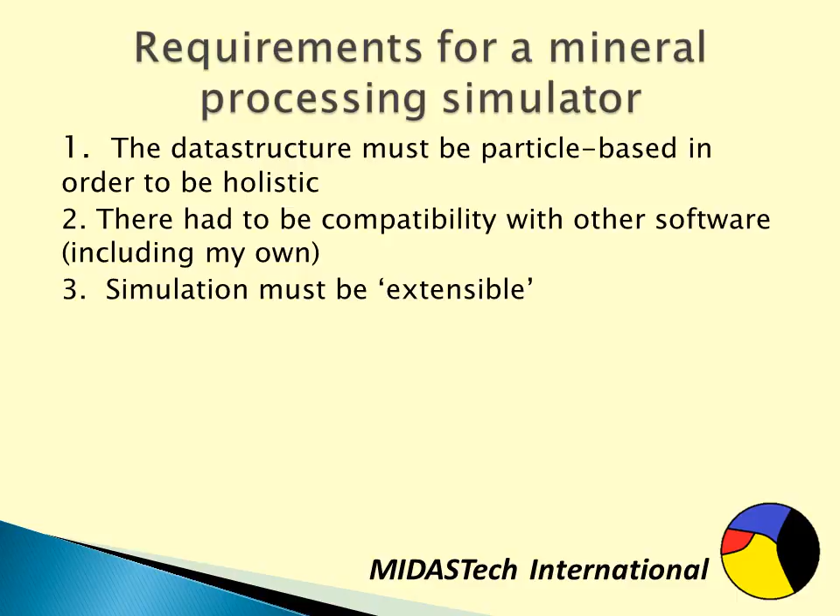The data structure must be particle-based in order to be holistic. There had to be compatibility with other software, including my own. Simulation must be extensible, meaning that users can add their own. One must recognise that simulation is only part of a larger analysis process.

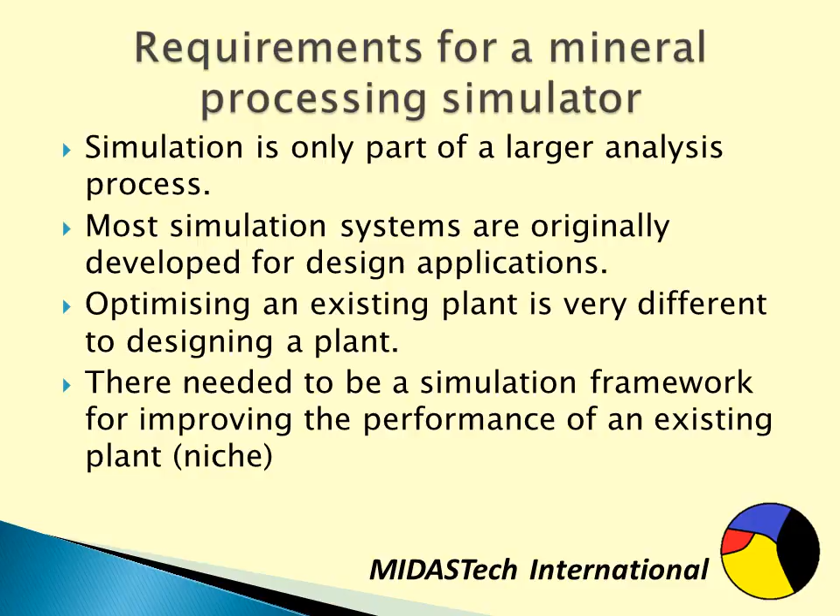Most simulation systems are originally designed for engineering design applications. Optimizing an existing plant is very different from designing a plant, and so there needed to be a simulation framework for improving the performance of an existing plant. And this is the niche market that our company is entering.

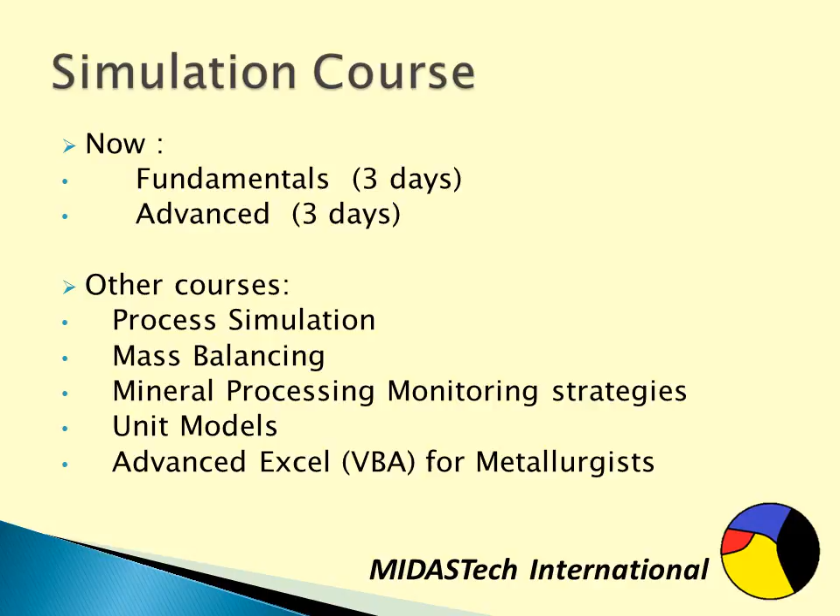There are other courses I give which are derivative courses of the simulation course: process simulation, mass balancing, mineral processing monitoring strategies, unit models, and advanced Excel for metallurgists.

I've already explained that in order to model a plant holistically, we need to use particles. That's because particles are truly what is being processed by a mineral processing plant. Also, we need to differentiate the ore properties from the unit models.

Hence, the same particle going through the same unit will have the same behaviour. Now, behaviour doesn't mean that if you put it through the same unit once, it goes through the concentrate, and the second time it must go through the concentrate. What it means is that the second time it has the same probability of going to the concentrate. So we see there is an association between behaviour and probability, and more importantly, a strong connection between mineral processing simulation and probability theory.

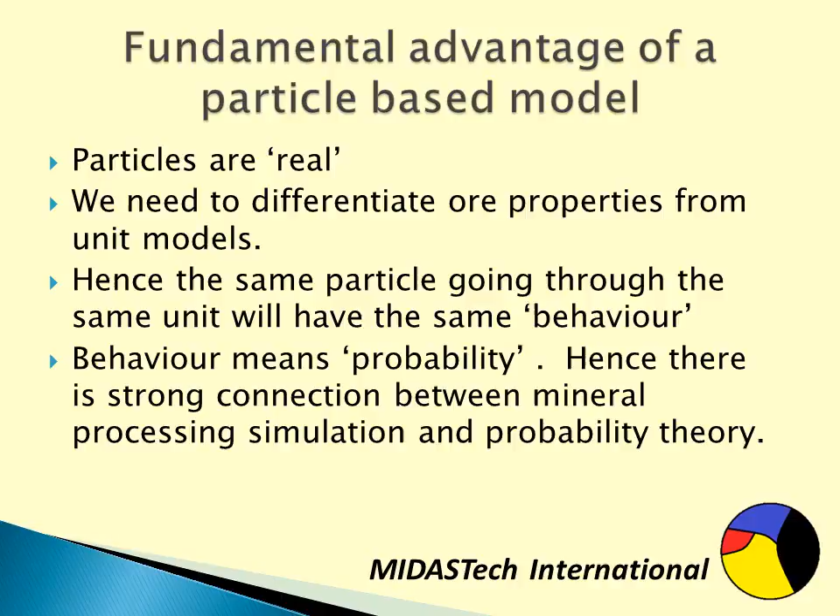So here we see a multi-mineral particle. It contains a number of different minerals. The red might be chalcopyrite and the yellow might be pyrite. Now, the floatability of this particle is affected not by how much one particular mineral is, but the distribution of all the minerals.

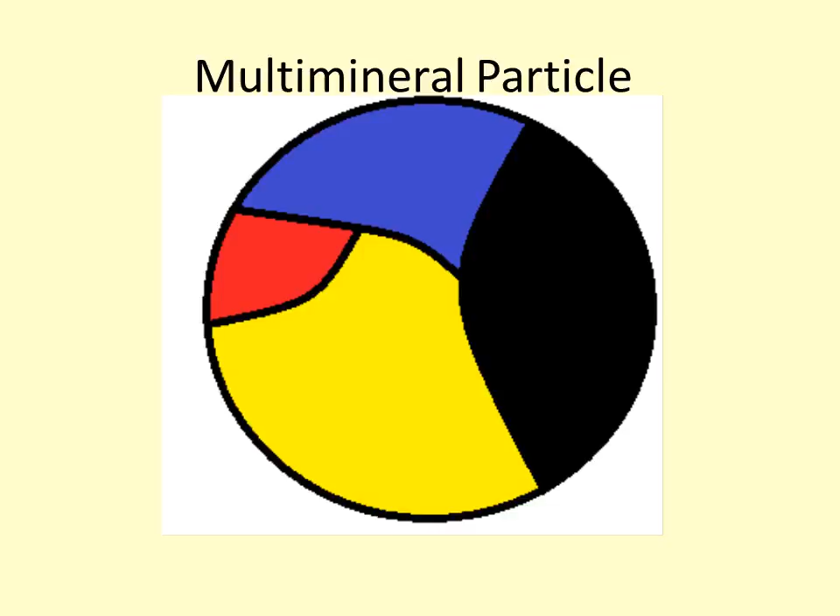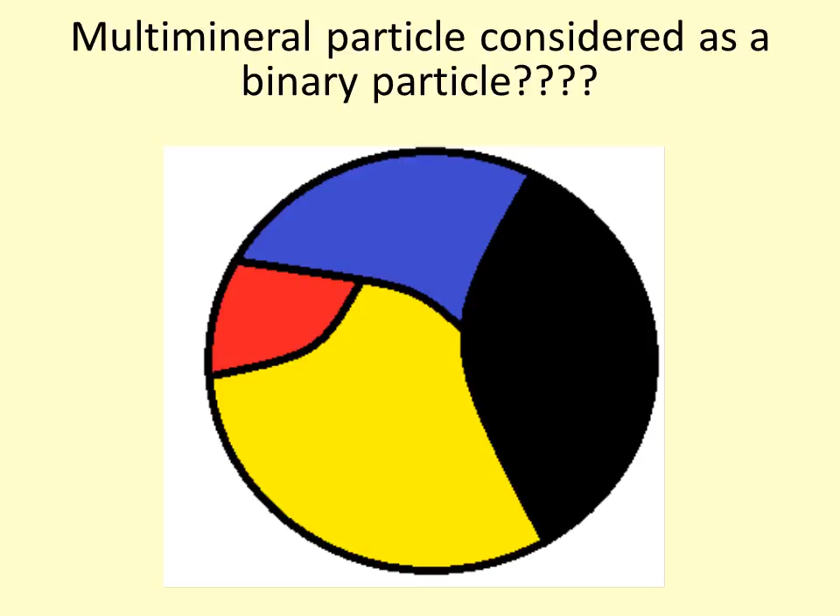So for complex ores, it doesn't seem very sensible to use any other data structure than multi-mineral particles. This is largely where existing mineral processing simulation systems have become stuck, because at best they know how to model binary particles and they don't really know how to treat multi-mineral particles. In the course, I provide the mathematical framework by which the extension to multi-mineral particles is not difficult. It just takes a little bit of time to understand the concept.

So here are some schematic diagrams explaining the basic concepts. Large feed particles go into a ball mill and they break and form smaller particles. In order to model this, we would like to know the probability that particular product particles came from particular feed particles.

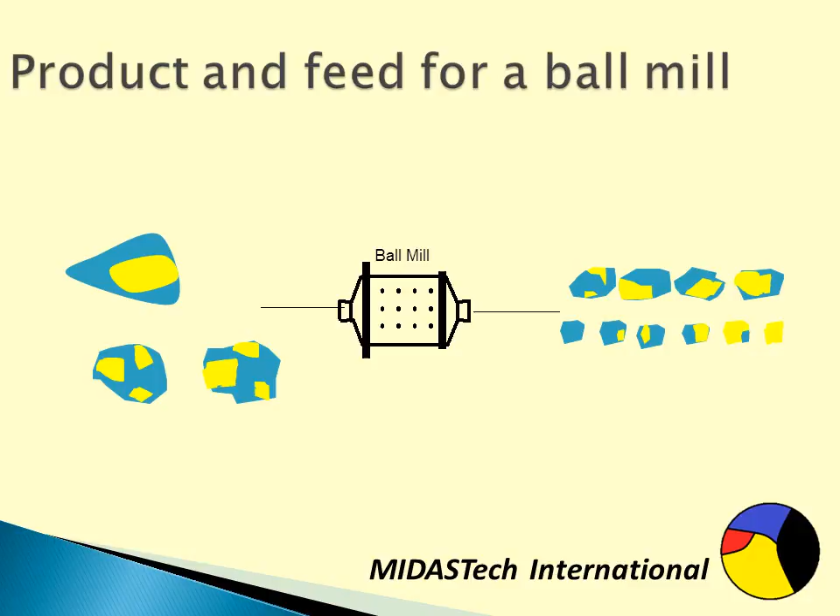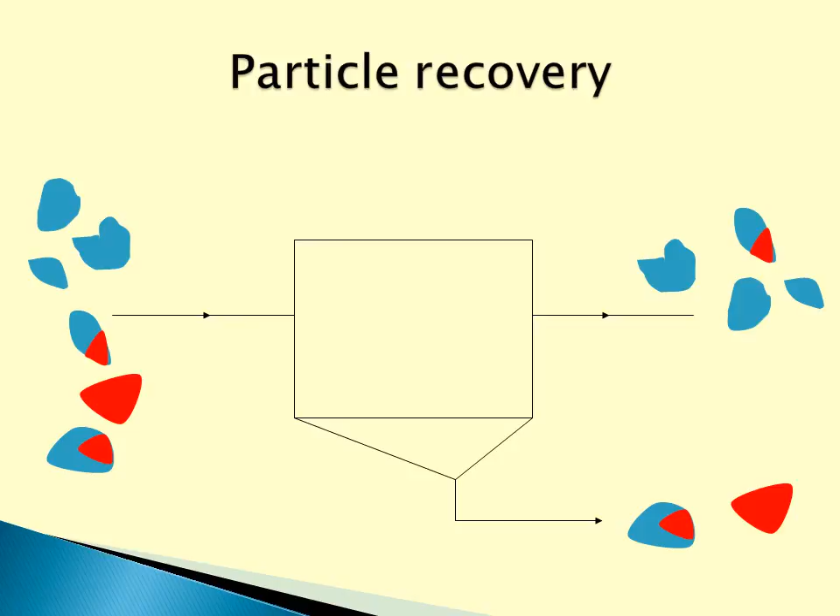I've now explained that probability theory is fundamental to mineral processing. Most engineers are comfortable with the phenomenological type of modelling strategy, which is inclusive of semi-empirical methods. Yet that type of approach is complementary to probability modelling. Many equations used in mineral processing - comminution, cyclone, flotation - also have a basis in probability theory.

Yet probability theory is not taught at appropriate depth to mineral processing engineers, inclusive of chemical engineers and mechanical engineers. There is generally a poor distinction between statistics and probability theory. I would argue that many mineral processing engineers are not aware that statistical methods and probability methods are not necessarily the same. Of course they're connected, but you can have professional statisticians and professional probabilitists.

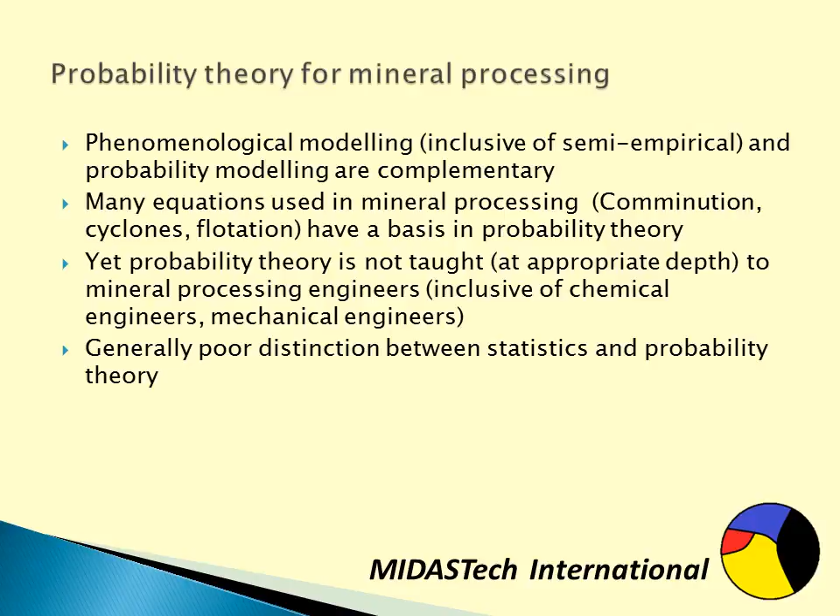We're now just going to go a little bit deeper to understand the difference between a macro process and a microprocess, because when we're talking about multi-mineral particles, it's quite difficult to measure these throughout the plant. So we have to distinguish the actual process from the observations. Something that we observe, such as assay, can be considered an observable. A microprocess is a process hidden from the observer that affects the macroprocess. Microprocesses do not have to be measured, but can be inferred from observable variables.

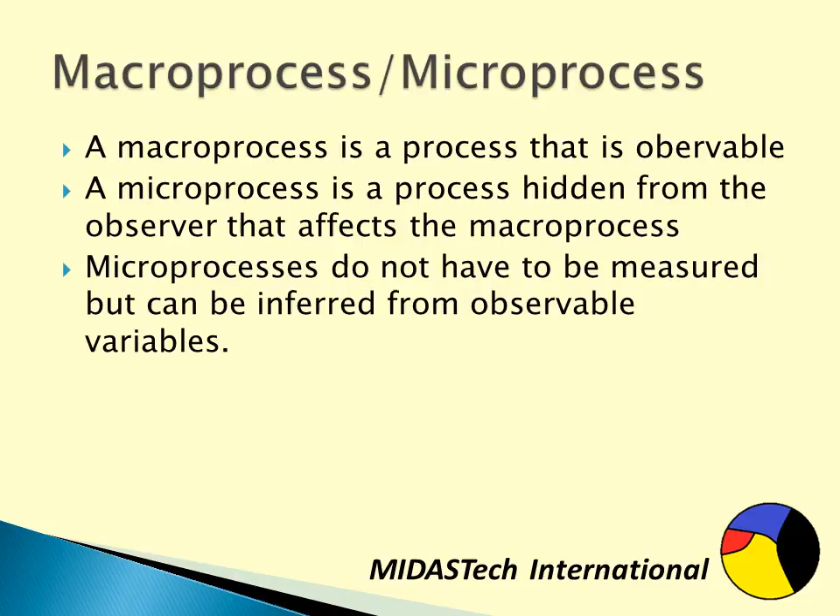Now we're going to go even further back in time, to 1904, to one of my favourite applied mathematicians and theoretical physicists, Ludwig Boltzmann. Boltzmann believed in the application of probability theory to theoretical physics, and also believed that atoms formed the fundamental structure of molecules. But at the time, his theory and the theory of others about atoms was rejected by most physicists.

This meant that Ludwig Boltzmann, when he wanted to go to a physics conference in St. Louis, was not invited to present at the physics section. Rather, he was stuck in a section called Applied Mathematics. He believed in his methods. 100 years later, they're shown to be valid, yet at the time he was given a lot of resistance. And yet we look back and laugh at this particular problem of Ludwig Boltzmann.

But here we are in mineral processing, over 100 years further than the physicists, and yet we're still not really using the correct data structure.

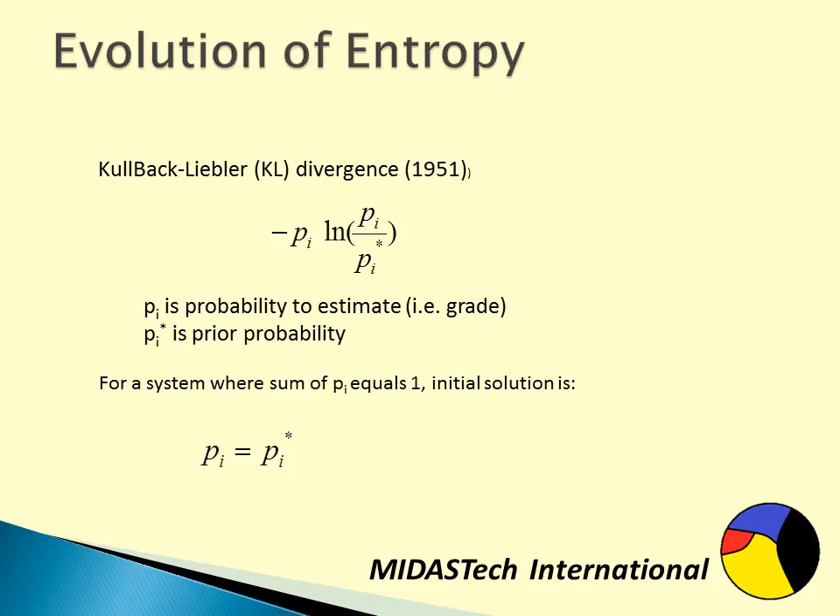The idea of a prior is important to understand because it's not the same as an assumption. A prior is a belief in the absence of information to the contrary, and it's adjustable. The variables are adjusted from their priors to satisfy other known information, such as fixed constraints, mass balance constraints.

In the absence of a prior, there's an interesting concept called an ignorant prior, which is commonly used, for which all variables are given the same value.

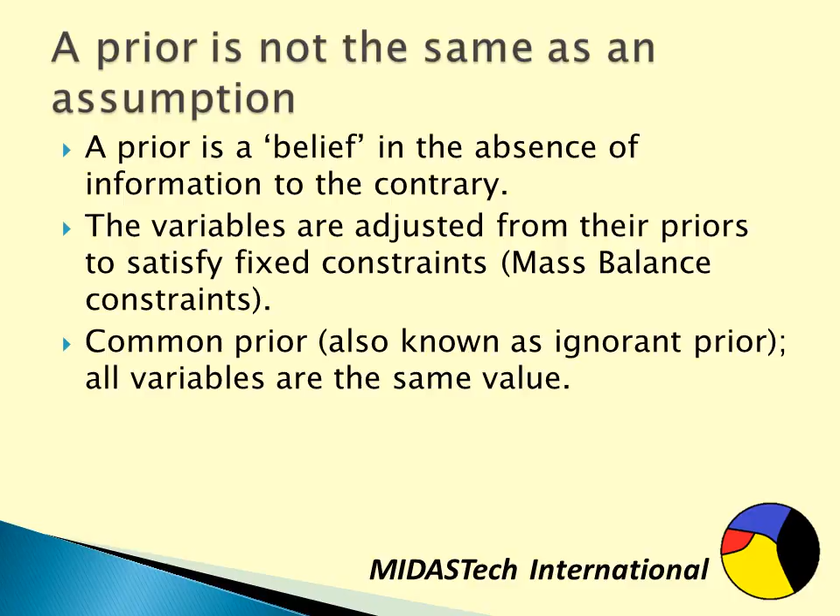We're now going to revisit the 9 steps, and where appropriate, look at it from a probabilistic viewpoint. Now, step 1 is flow sheeting, which really doesn't have much to do with probability theory. But many simulation systems create in-house dedicated flowsheet systems, rendering it difficult for users to use other systems. And one could argue it's an intentional commercial strategy.

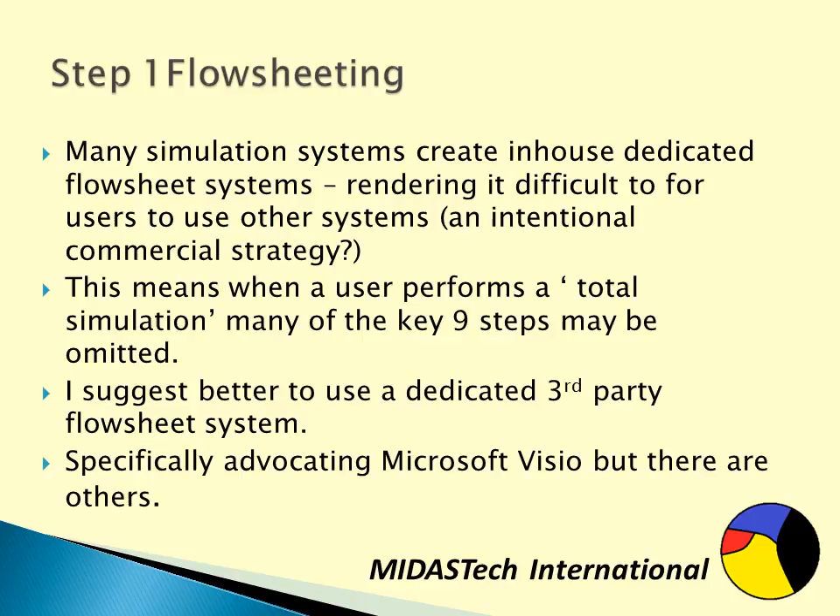This means when a user performs a total simulation, many of the key 9 steps may be omitted. And so, personally, I would prefer to use a third-party flowsheet system. I'm specifically advocating Microsoft Visio, but there are other systems available.

Microsoft Visio is at least 20 years old, and when I first discovered it, I actually went to the local electrical store, Harvey Norman, and I saw that it costs $45. These days it costs about $500 if you can get it fairly cheaply. But most mining company professional staff would already have access to Visio through Microsoft Office Professional.

Step 2, data collection. If a company doesn't collect data, then it might collect limited useful data, excessive data, or collect useful data but isn't analysing it. I have discovered that the major issue most companies would have with the 9 steps that I'm advocating would be this problem of data collection. Many companies do not collect data, at least not in a format that's useful to identify how to improve a mineral processing plant.

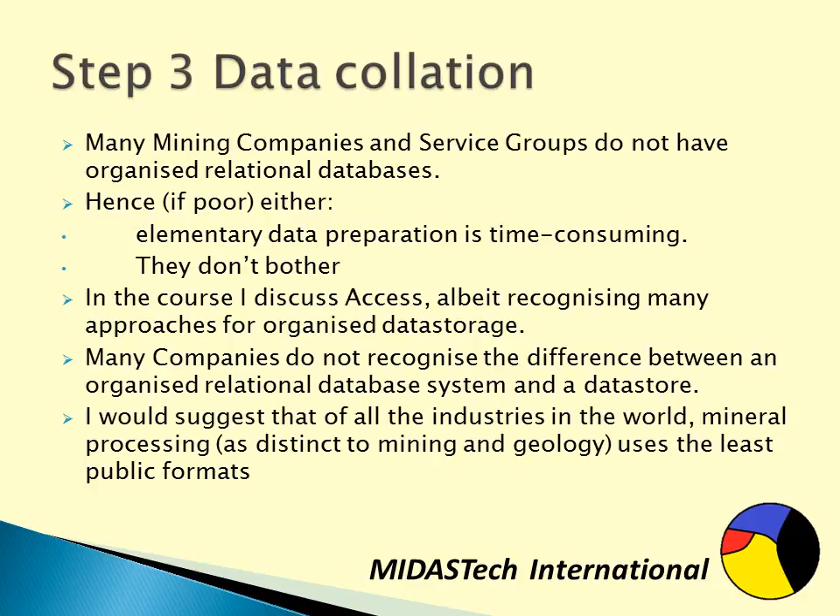Step 4 is mass balancing. Mass balancing is a process by which observed variables are adjusted so that mass flows are consistent between feed and product. That's the primary objective. The second objective is that some unmeasured variables are estimated. And the most common unmeasured variables are solid flows and unmeasured streams.

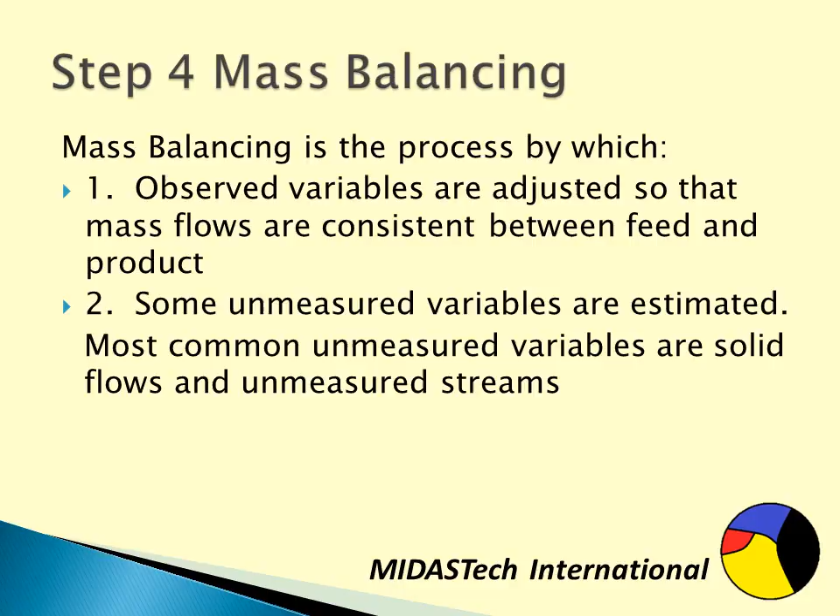Yet, the more unmeasured variables we're trying to estimate, the harder it is to actually do. And there comes a point where the conventional approaches of mass balancing are no longer applicable. At that level, where we now have lots of unknown variables, those variables can be estimated by what's called plausible inference. So we need to differentiate deductive inference from plausible inference, and we'll discuss that further. In law courts, deductive inference is allowable, not plausible inference. So in plausible inference, there's a fairly high level of uncertainty.

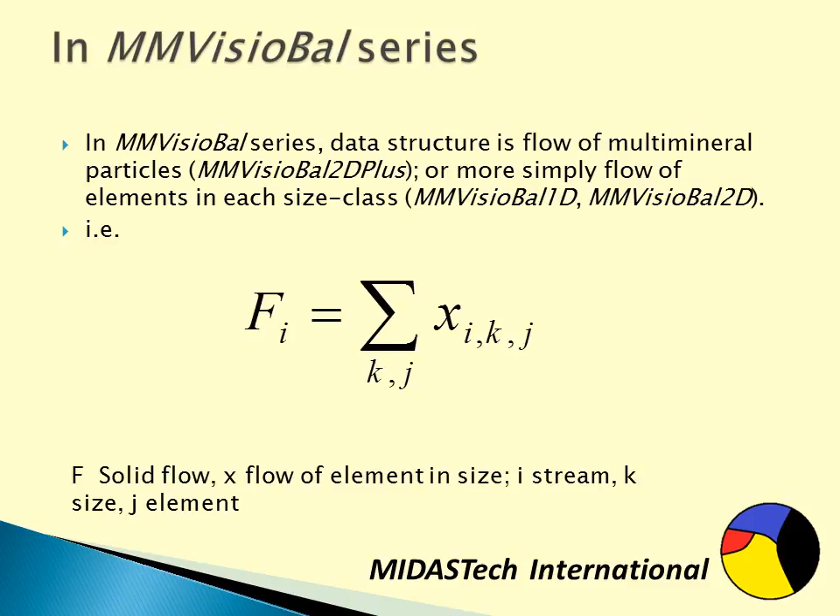In my software, in the mass balancing software, the data structure is the flow of components. So if we know the multimineral particle types, it's the distinct flow of multimineral particles. But if it's not that, it might be the flow of the elements in each size class. This data structure is quite different to classical mass balance systems.

I actually use an information theory approach. I don't specifically use priors. The information that is known, such as the observation of variables, is regarded as constraints. So in stage 1, I use an information theory approach, and I use the observations as constraints. Of course, some of the observations might be contradictory. So in stage 2, I remove the observation constraint and just let it finish iterating.

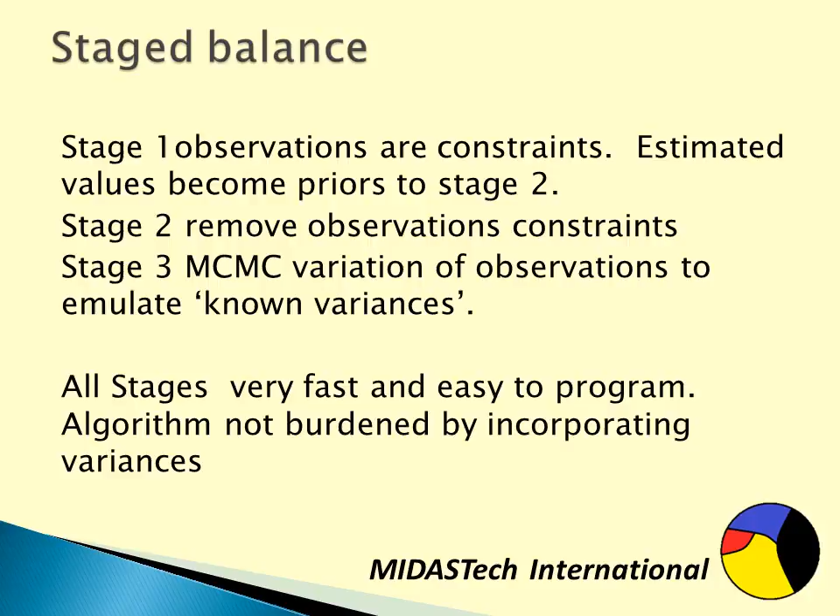And now that's a mass balance where the values have been adjusted. Now, I don't have to use the variances of the observation value. This is a common method used in mineral processing, and in general, it's very confusing because the variances are not known, yet they still put them in. However, for those users who wish to use variances, we can still use information theory. A Markov chain Monte Carlo method allows variation of observations to emulate known variances. This information theory approach means that all stages are very fast and easy to program, and algorithms are not burdened by incorporating variances.

Step 5 is inference, and this is a key step that is being made available through the MIDASTech software. The data structure used in MMVisioBal is a particle-based system rather than variable-based. It turns out that if sizes are measured and bulk assays are measured, MMVisioBal will still estimate the assays within sizes even if they're unmeasured.

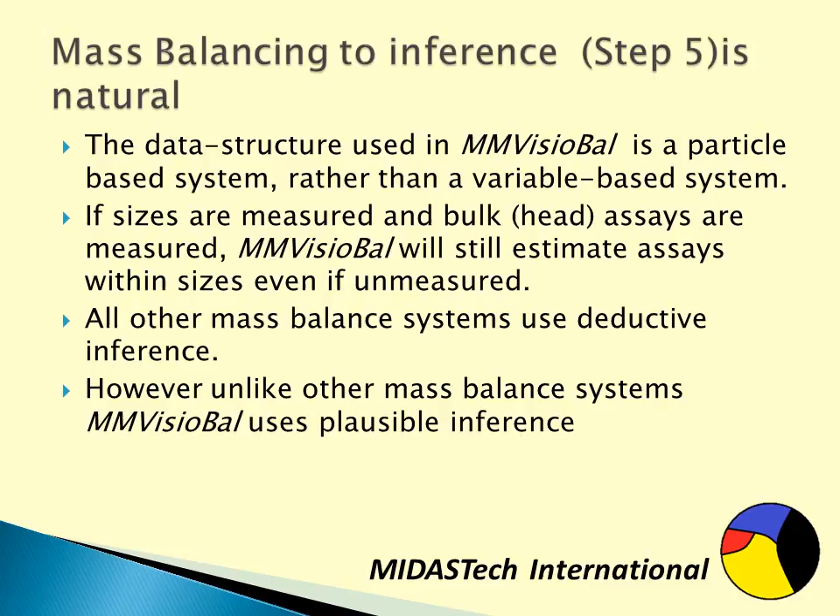All other mass balance systems use deductive inference. This means they cannot estimate the assays within sizes if they're unmeasured. So the distinction between this software and conventional software is that it uses plausible inference.

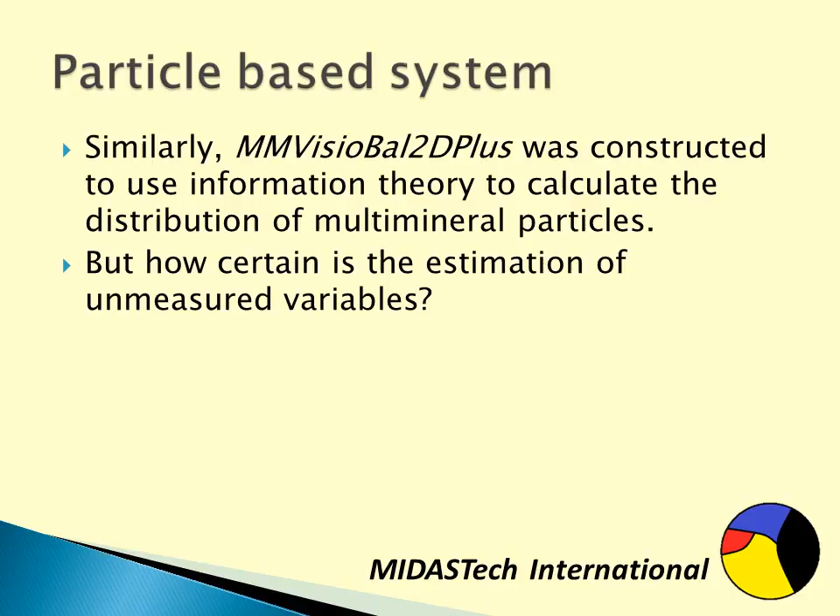MMVisioBal2DPlus does use the multimineral particle distributions, and so it can be used to estimate the distribution of multimineral particles in each stream. The question is, if it's using plausible inference, how certain is the estimation of these unmeasured variables? So how uncertain are some of these estimated variables? Some of the estimated variables may be so uncertain as to be rendered impractical, and others may be so certain as to be practical. So increased functionality has caused some general uncertainty.

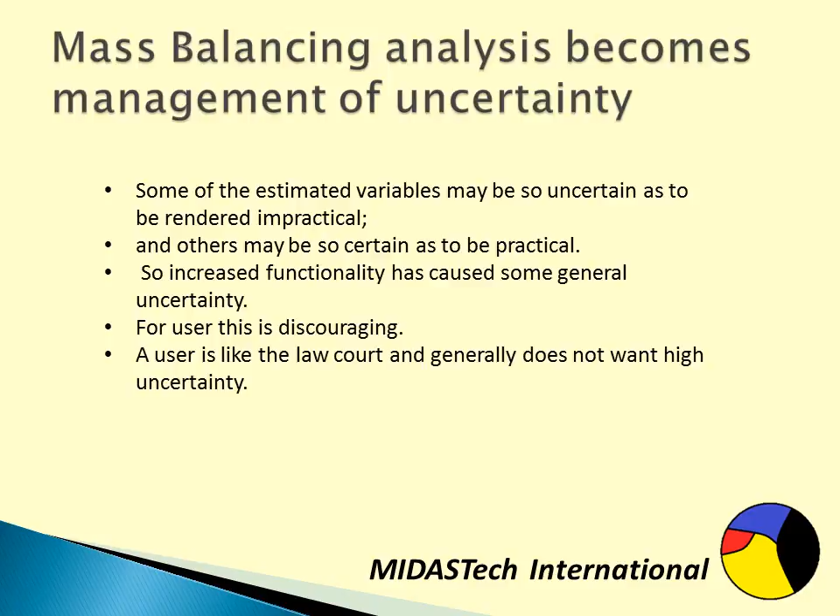For a user, this is discouraging. A user is like the law court and generally does not want high uncertainty. And therefore I had to think about methodologies to improve the certainty of these unmeasured variables. And it became obvious that if I used information from different audits, it would provide me with a huge advantage. And there's a provisional patent filed on this methodology.

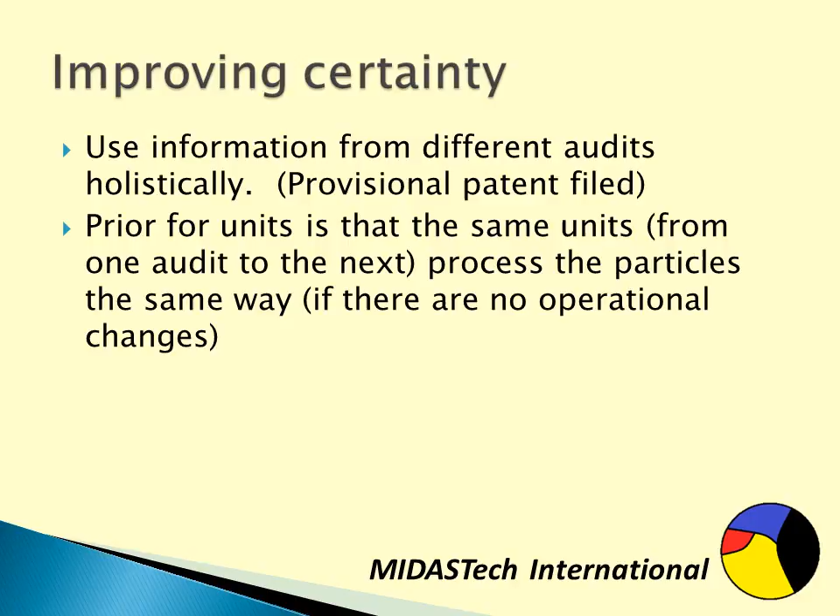The prior for units is that the same units process the particles the same way if there are no operational changes. And if you remember, this was the fundamental concept for why we need to differentiate ore properties from unit properties. There is a surprising benefit to this methodology. Because the information from different plant audits of the same plant are now integrated, we need less measurements per audit.

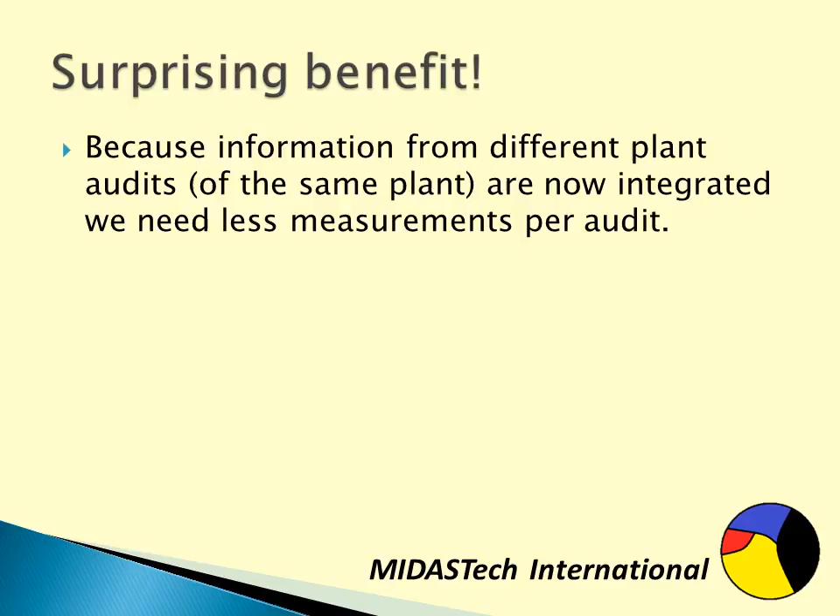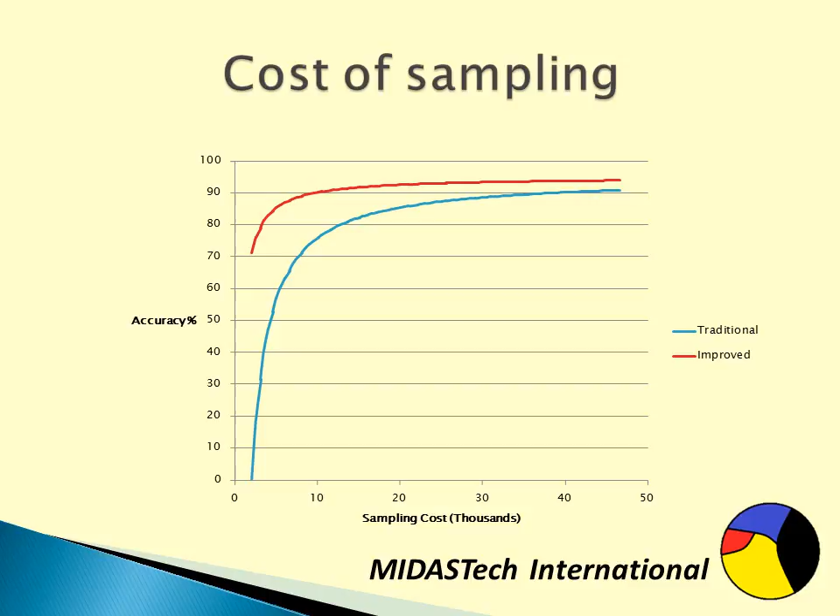I've put forward this idea that the methodologies advocated in this presentation can greatly reduce the cost of sampling. The blue line indicates the traditional approach, and the red line indicates the new approach. For the same cost, we get higher accuracy, or for a given accuracy, we can do it with far less cost.

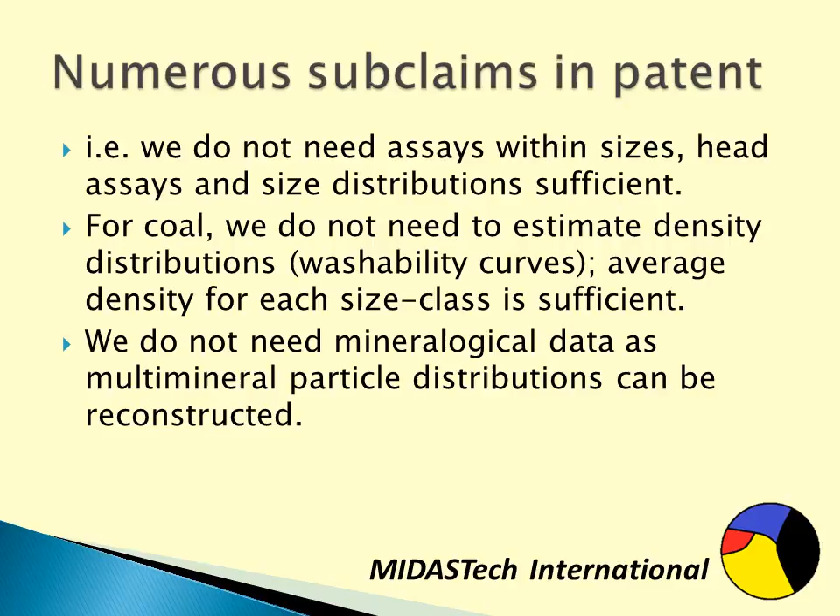There are numerous subclaims in the patent. We do not need assays within sizes—head assays and size distributions are sufficient. For coal, we do not need to estimate density distributions or washability curves; average density for each size class is sufficient. We do not need mineralogical data, as multimineral particle distributions can be reconstructed.

Yes, because a detailed sampling campaign may not actually be required. No, because the more measurements, the better—remember, there is uncertainty, and it allows reduction of uncertainty and better identification of problem units. But what I'm really saying is that this methodology provides a different viewpoint: information theory provides the basis for strategic sampling.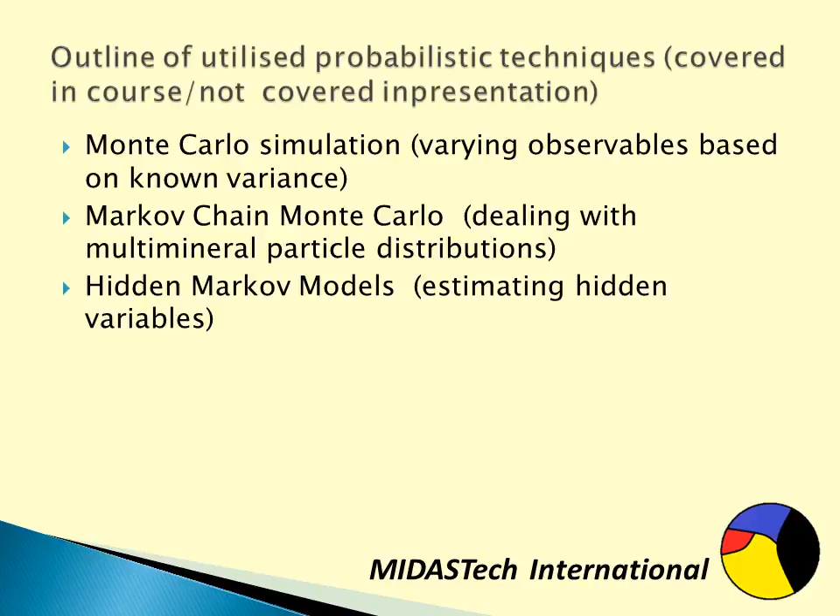In the following diagrams, I wish to just elucidate the methodology. The traditional approach is: we have input observable ore properties, operating parameters, a unit model, and from that we estimate our output observable ore properties. And that would be fine if it worked.

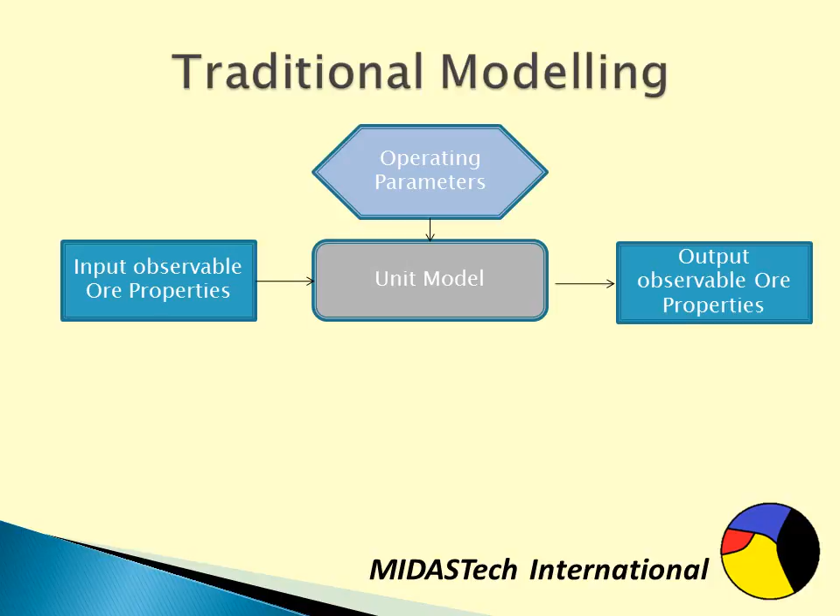The trouble is that the actual mineral information is more detailed than those observable ore properties. So the only correct way to do it is to recognize that the ore properties have to be understood in depth—I've called that the input hidden ore property. We now apply that information to the unit model and we get the hidden output ore properties, from which we can get the output observable ore properties, such as grade of mineral and recovery.

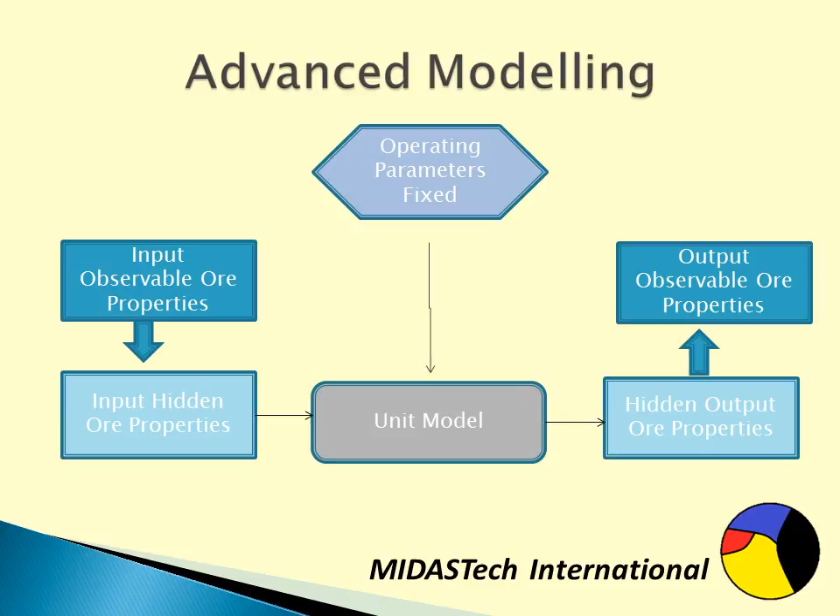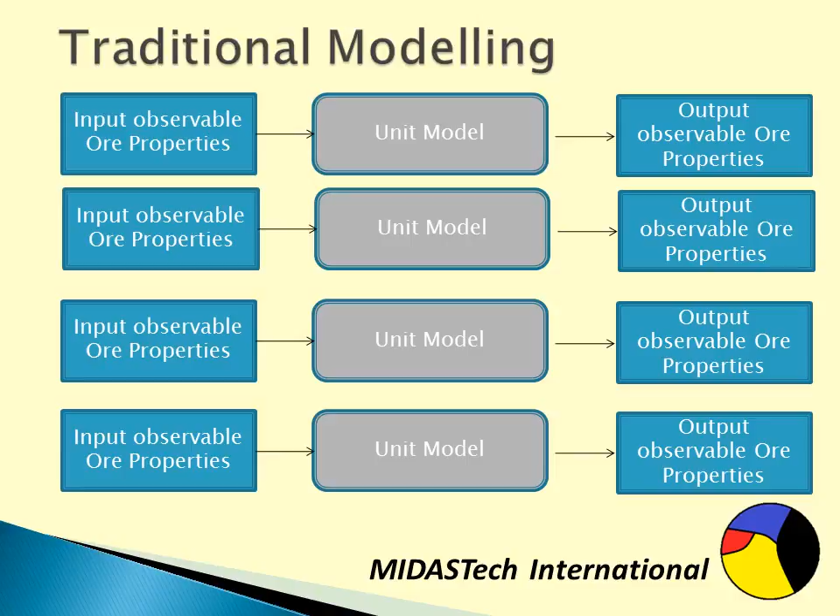Traditional approach, particularly true for laboratory sampling: input observable ore properties goes to, say, a lab test, a flotation test, and we look at the outputs. From that, we work out the properties, the kinetic rates. Another sample, model, set, output, and so forth.

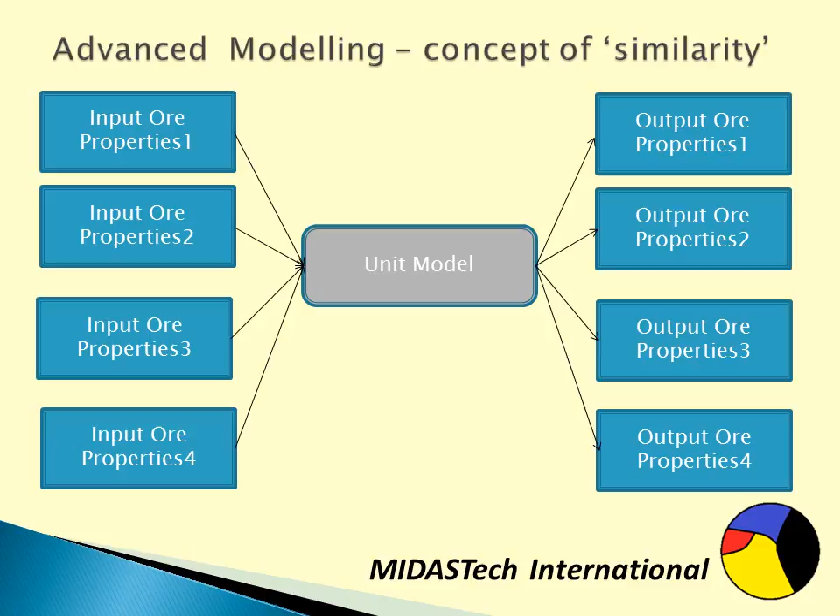I'm arguing that it's far more efficient to realise that they're going into the same particular unit, and therefore the unit model, if correctly identified, is the same for each of the different samples. And so we're trying to holistically consider all the data.

Step 6 is to define the operational variables. And this is where the seminar and the course gets controversial, because many models don't actually use operating variables. They are indeed very hard to implement practically. This doesn't mean they don't provide insight. But if you actually analyse where we are at with mineral processing modelling, then we're still very far behind from where we should be.

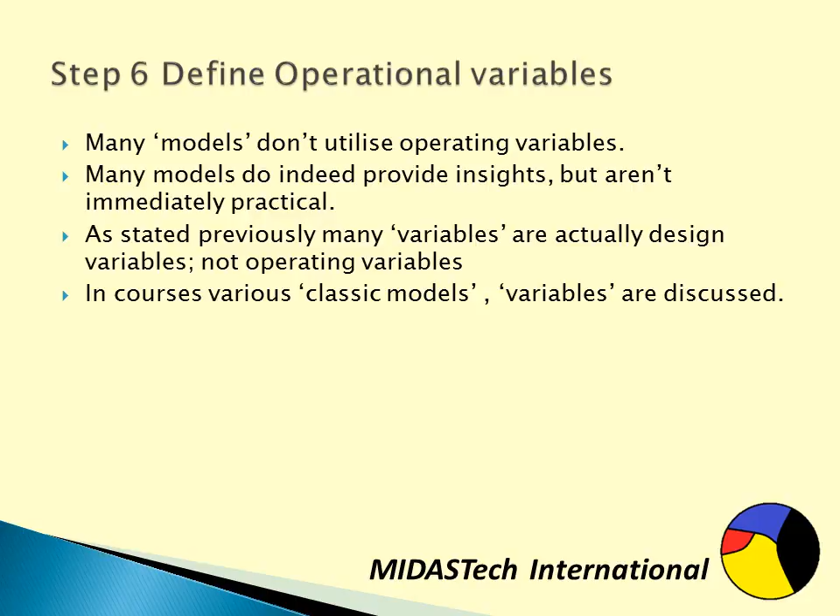Many variables used in simulating the plant are actually design variables rather than operating variables. In the course I give, I discuss the various classic models, and I go into the variables in much greater detail than I do here. It does indeed take about half a day to study.

Users need to specify the operating variables. So the software I've created has an operational parameter registration system. It provides a framework, and the software is customized for specific clients. Yet there may be two different staff who wish to simulate the same plant, but interested in different operating parameters.

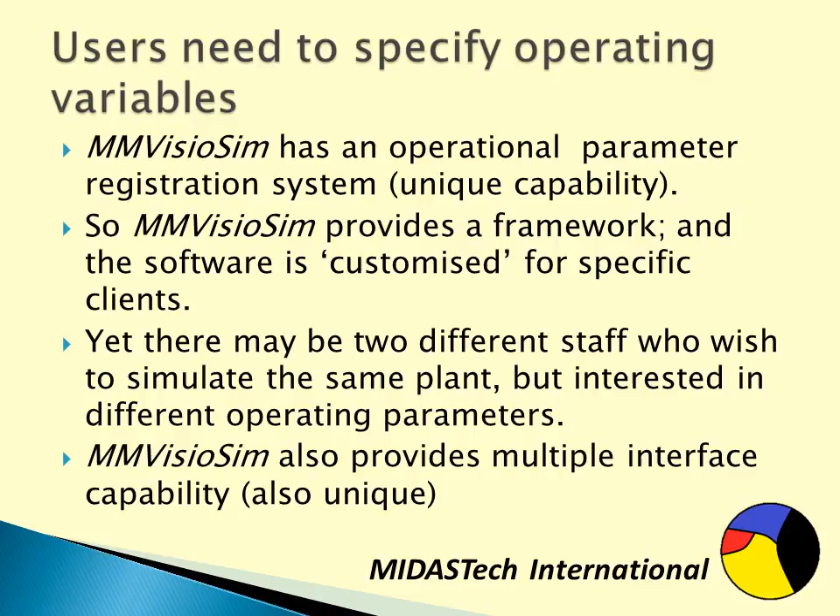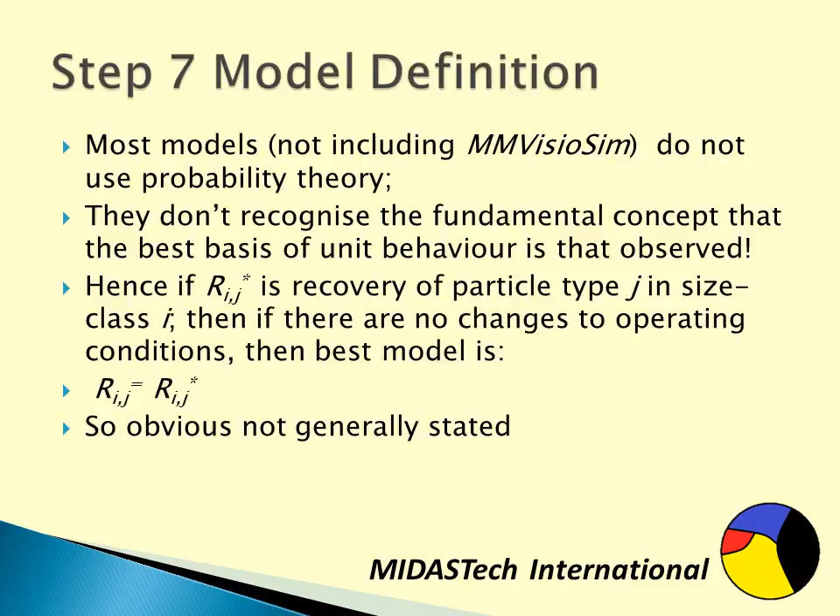So the inference method allows one to identify how units are processing ore at the particle level. Models should therefore be based on predicting changes to unit behavior.

When you think about it this way, you recognize that many of the simulation books in mineral processing need to be rewritten. Because MMVisioBal2DPlus looks at how units process ore, if operators record changes to operational parameters, it's then possible to more easily develop models for unit changes due to operational parameters.

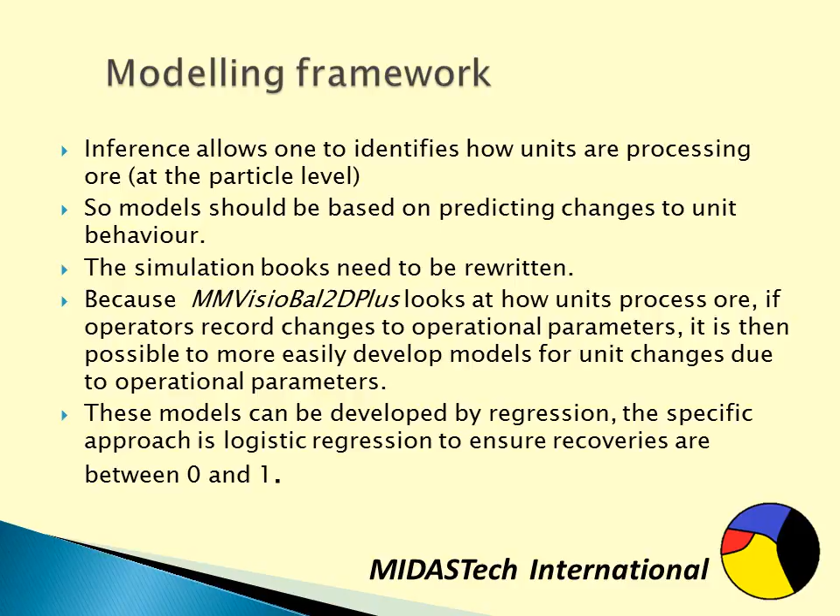These models can be developed by regression. The specific approach I advocate is logistic regression, to ensure recoveries are between 0 and 1, or 100%.

The methods in this presentation therefore advocate using the data to determine the model, rather than using imposed models, because imposed models generally do not go to the right level of depth and aren't specifically related to the operational parameters. Hence, the method advocated here is logistic regression, which in itself is a form of machine learning.

Machine learning has a particular definition, but what I want you to focus on is that machine learning is based on learning from data, rather than following explicitly programmed instructions.

I'd also like to emphasize that the software, the simulation system, can use and will use models which are already available. However, when there is a lot of data, a data-driven model structure is preferred. Hence, the approach of using logistic regression is a form of machine learning.

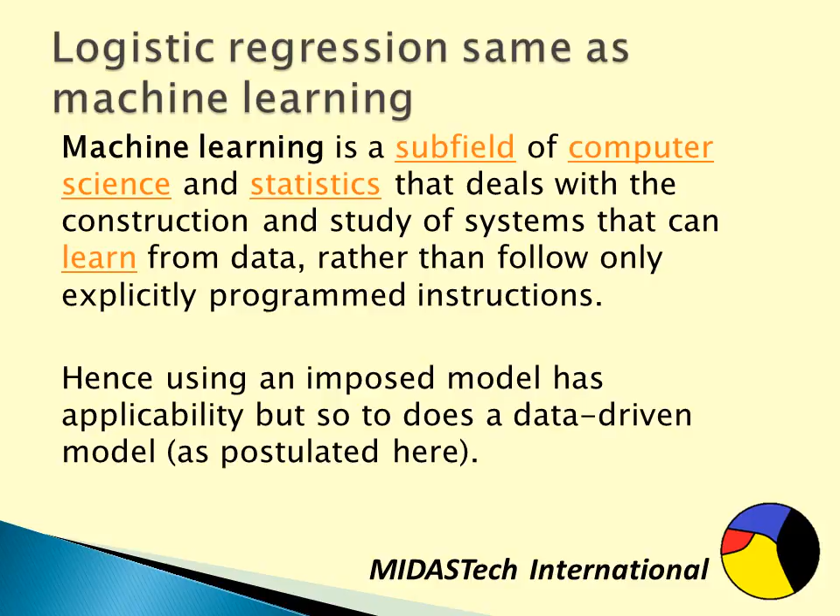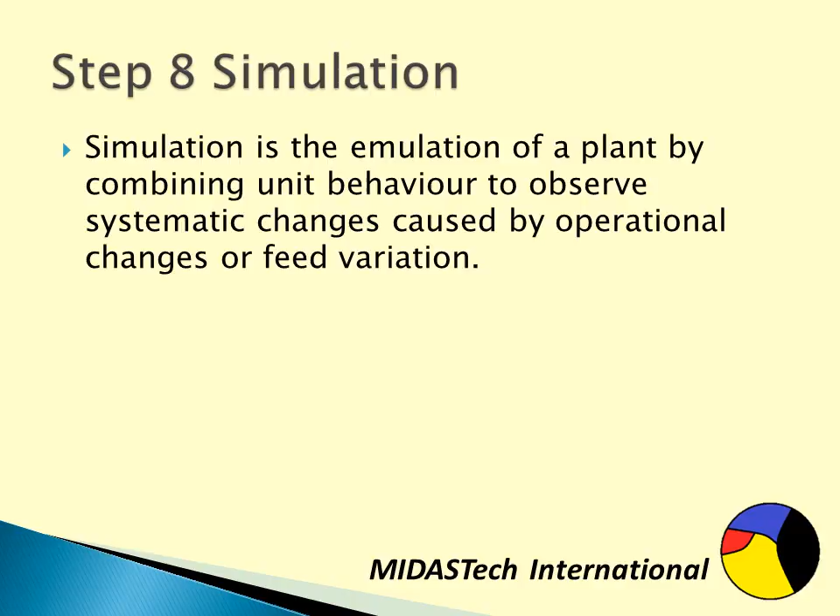Simulation is therefore just step 8. It's the emulation of a plant by combining unit behavior to observe systematic changes caused by operational changes or feed variation.

Again, different users may want to use different models, and again, the simulation system will support this ability for people to look at the same data differently.

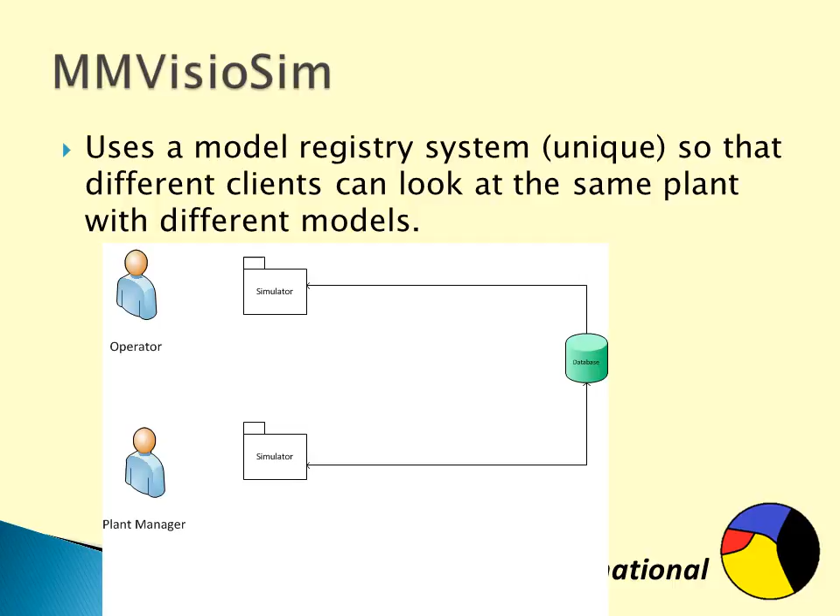Step 9 is optimization. Engineers like to optimize a plant, but it is an overused term. In operations research, optimization means finding the maximum value of the target variable, given certain constraints.

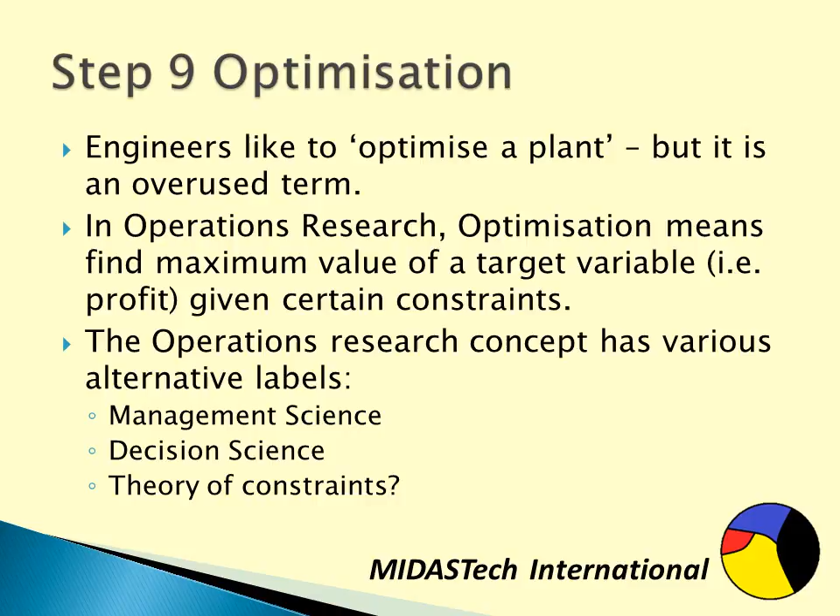The operations research concept has various alternative labels: management science, decision science, and lately theory of constraints, which seems to have become popular in medicine.

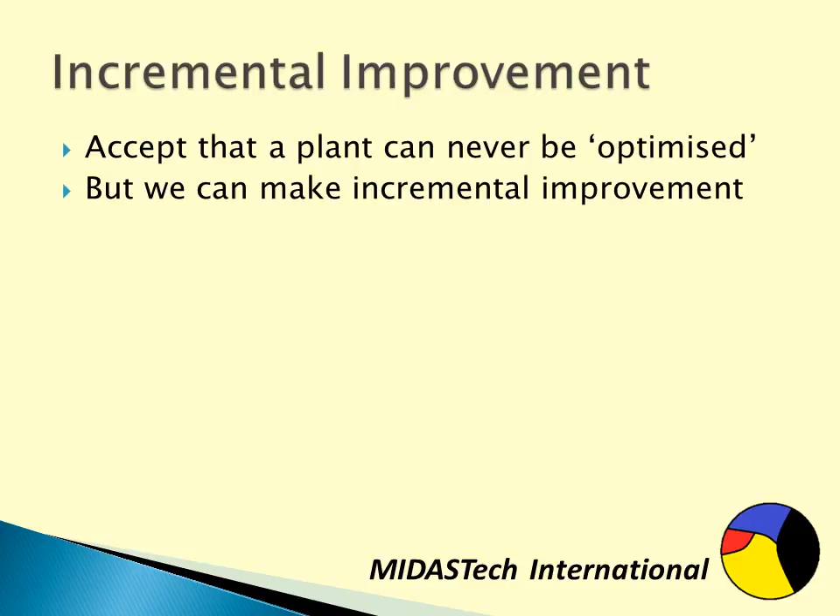But if we accept that at any snapshot in time we can't optimize a plant, because there's always uncertainty and hidden variables, we can, however, make incremental improvements.

So if someone says detailed sampling has in fact increased the profitability of the plant, no argument here.

But I'm suggesting that for a much lower technical cost, you could have incrementally improved the plant. Maybe not as well as you could have done by detailed sampling, but then you can do a second sampling strategy, and then a third.

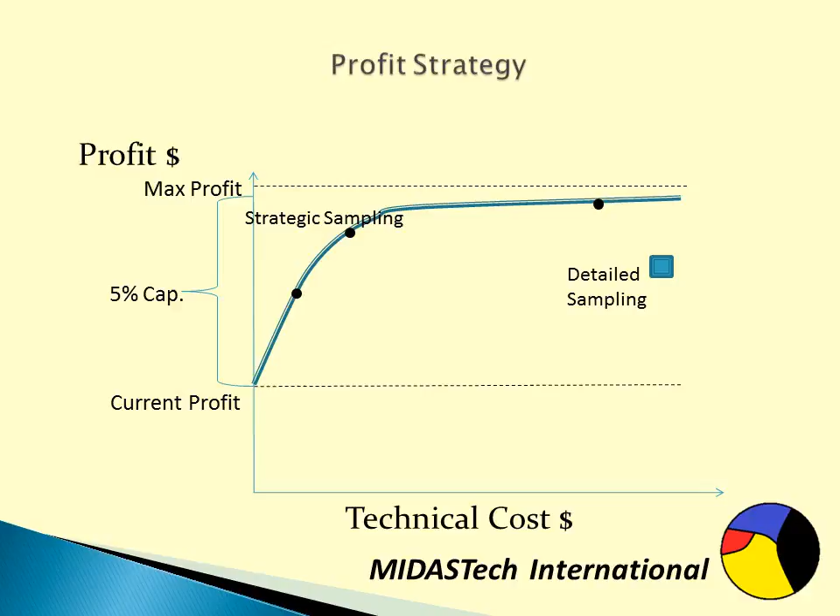But in the long term, the advantages of a strategic sampling method versus a detailed sampling method is that you'll get much closer to that optimum profit. And of course, there's a time advantage of this approach.

If you're actually monitoring a plant monthly, daily, or hourly, this is going to be a lot more advantageous if you can make those changes over those time frames rather than in a once-a-year campaign.

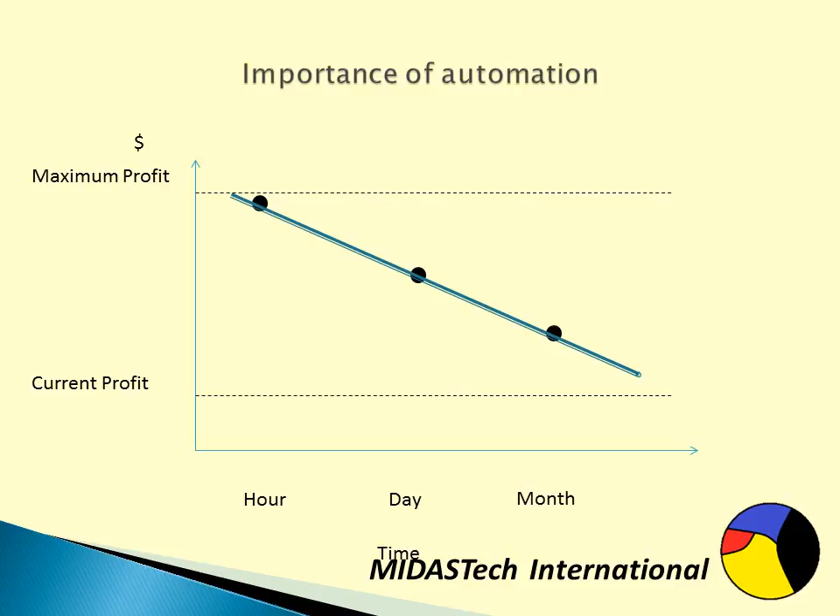That concludes what I'm going to discuss about the general process, and I'm just going to focus on inference, which is the niche capability of MIDAS.

In the actual course, I give numerous examples of inference and how it's a benefit. In this particular presentation, I'm giving one example only.

My long-term objective is to validate inference for an entire flotation circuit, but in this talk, I just show the method for one flotation cell.

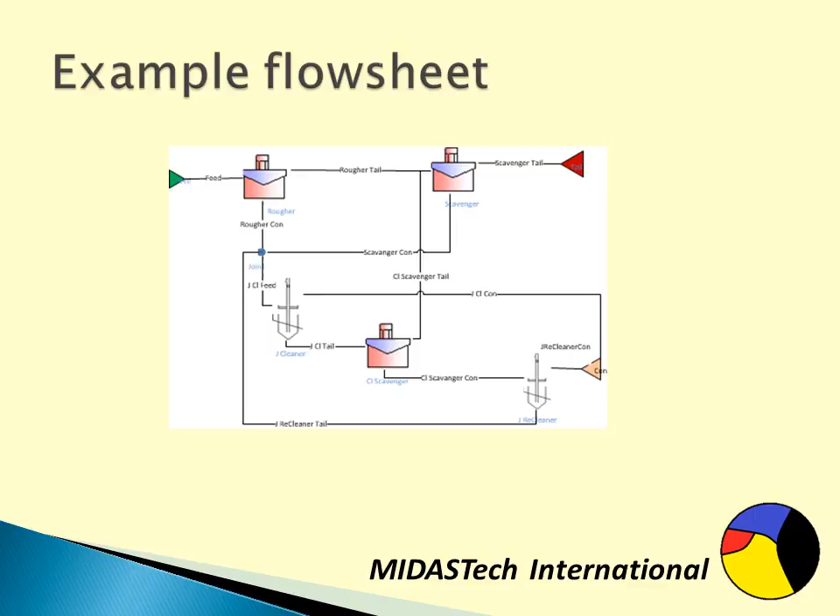The circuit I'm working on is that presented earlier, and I'm focusing just on the Rougher-Con. The validation is largely schematic.

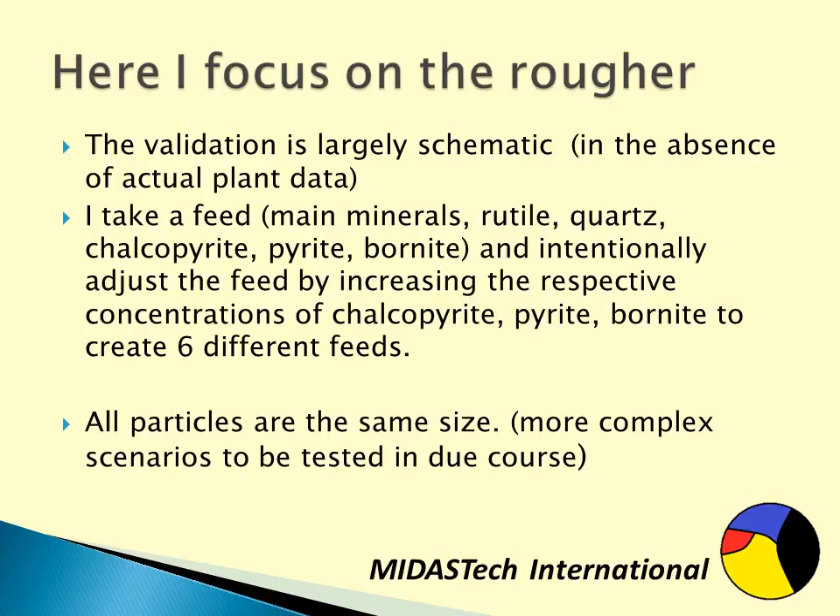It is a real feed and real MLA data, but I don't have full access to the company data. I take a feed and intentionally adjust it by increasing the respective concentrations of minerals of interest—chalcopyrite, pyrite, bornite—to create 6 different feeds. For simplicity, all particles are the same size, and I'll be doing more complex scenarios in future.

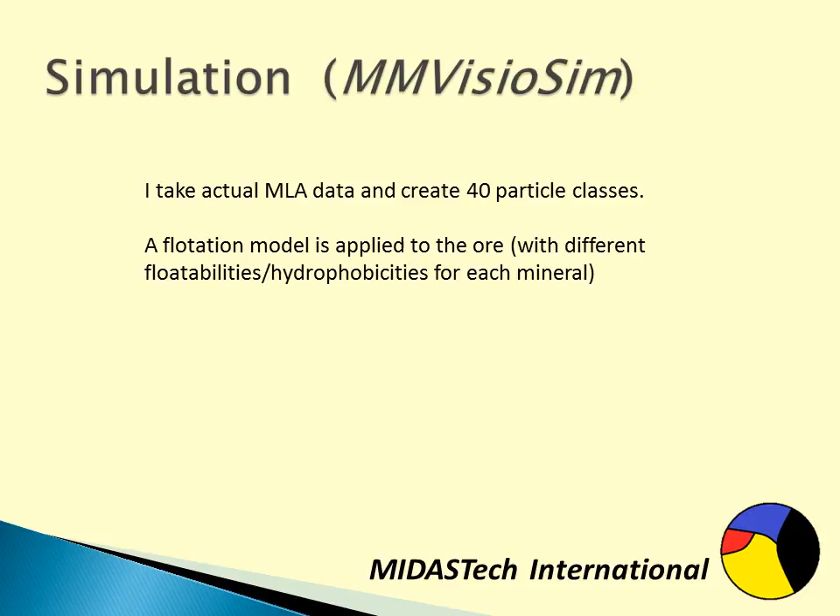A flotation model is applied to the ore with different floatability, hydrophobicities. So in the simulation I create the Rougher-Con and the Rougher tail, and now I want to back calculate what that flotation model was by using the feed particle distributions and the solid flows only in the con and tail. The back calculation procedure knows nothing about the flotation model.

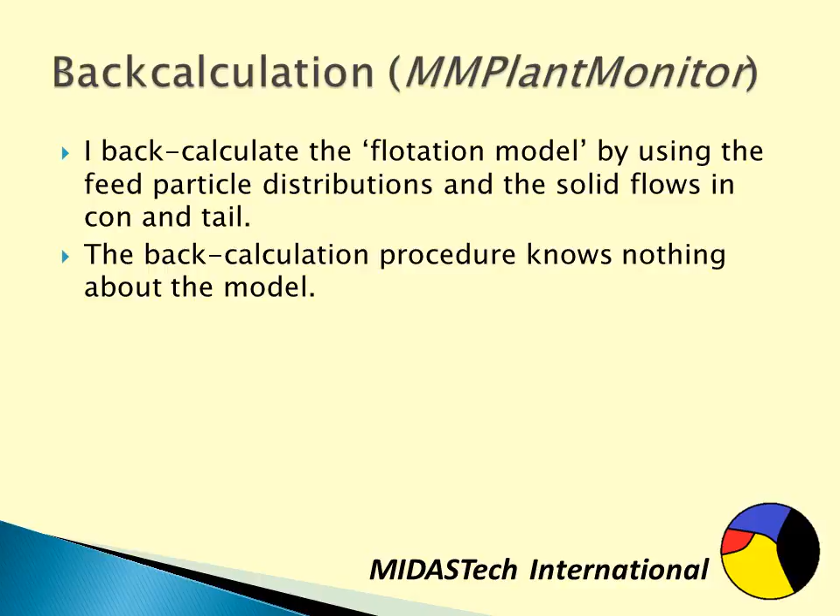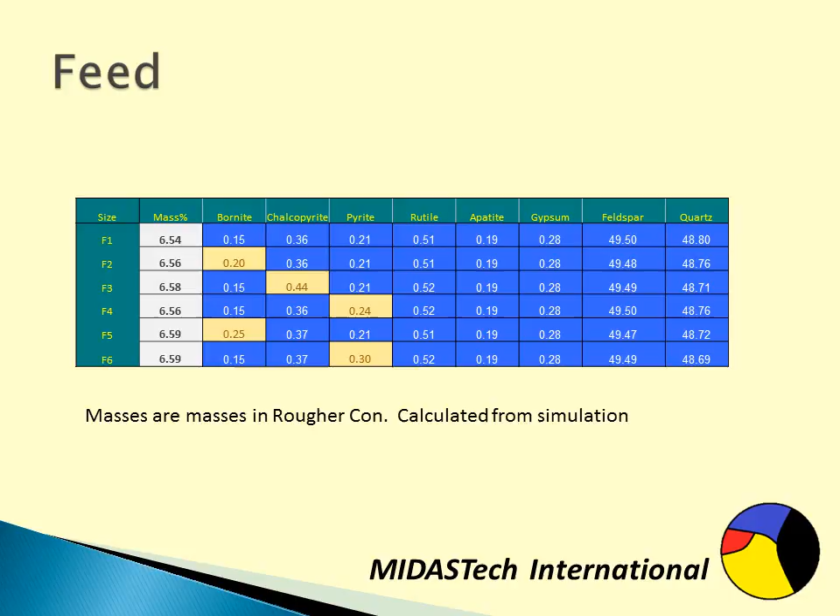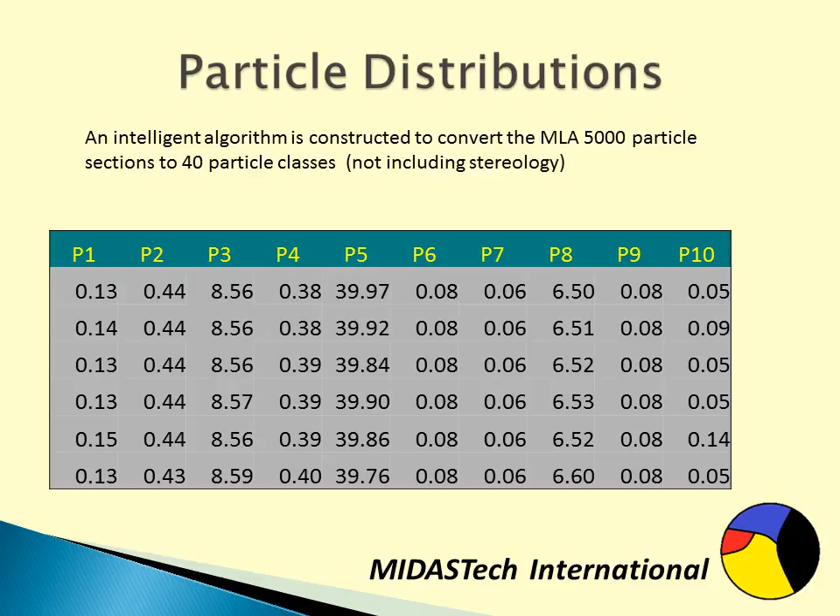Here's an example of the particle distributions for each feed—there's actually 40 particle classes, I've only shown some. If you look at the 10th particle class, you can see it jumps quite a lot, because this is largely liberated bornite. And here's particle type 15—it has bornite, feldspar, and quartz, so it's that multi-mineral particle that is fundamental to mineral processing.

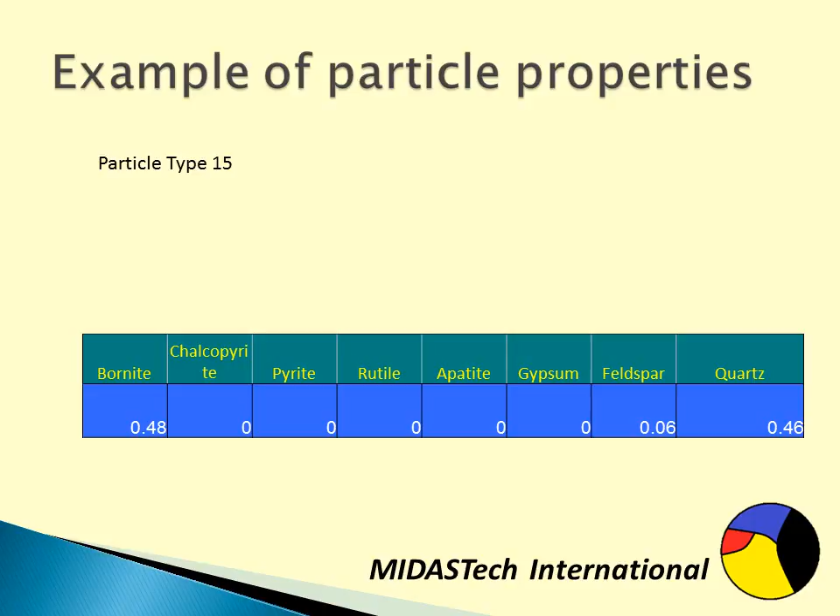The methodology of back calculation: well, I start with an ignorant prior. The probability a particle will go to the con is a half.

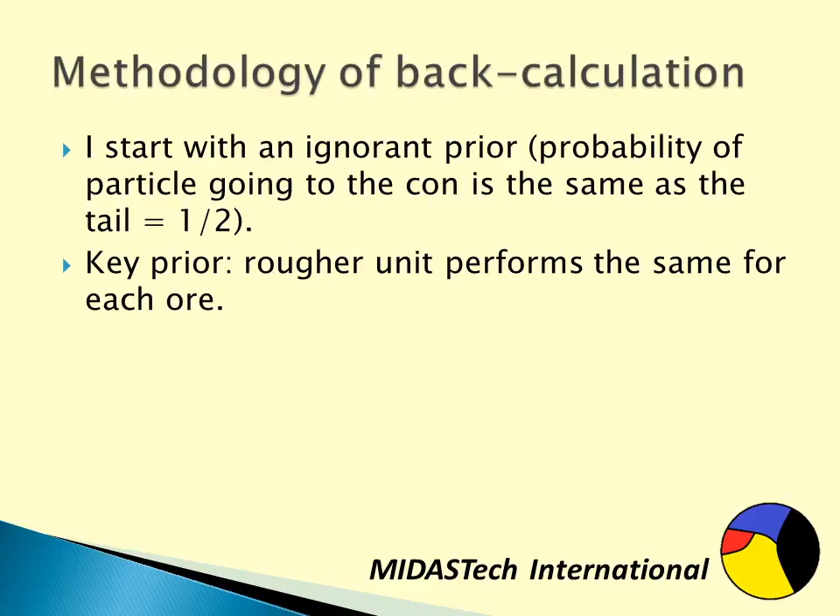But I'm presuming that the model for each of the different feeds for the rougher is the same. So I adjust the prior for each ore so that the con solid flows are satisfied. I then take an average of the partition curve over these particular ores. A direct average will not develop any shape. The averaging is weighted by the respective feed, and there's mathematical reasons why one has to do that.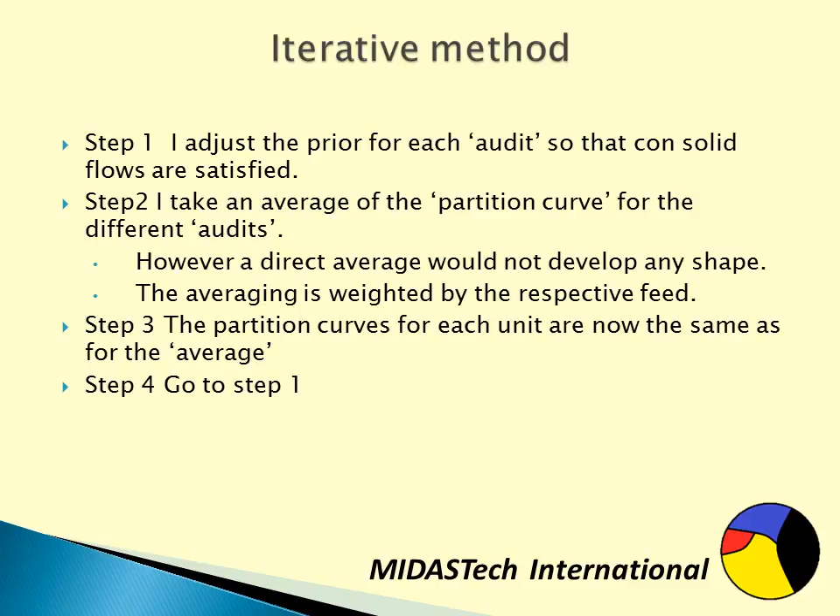If I only did one iteration, the results are terrible—there is no discernment of the partition curve at all. But if I use many iterations, a smart algorithm is used to make sure the algorithm iterates efficiently. And in less than 1 second of CPU time, although actually many iterations, we get it.

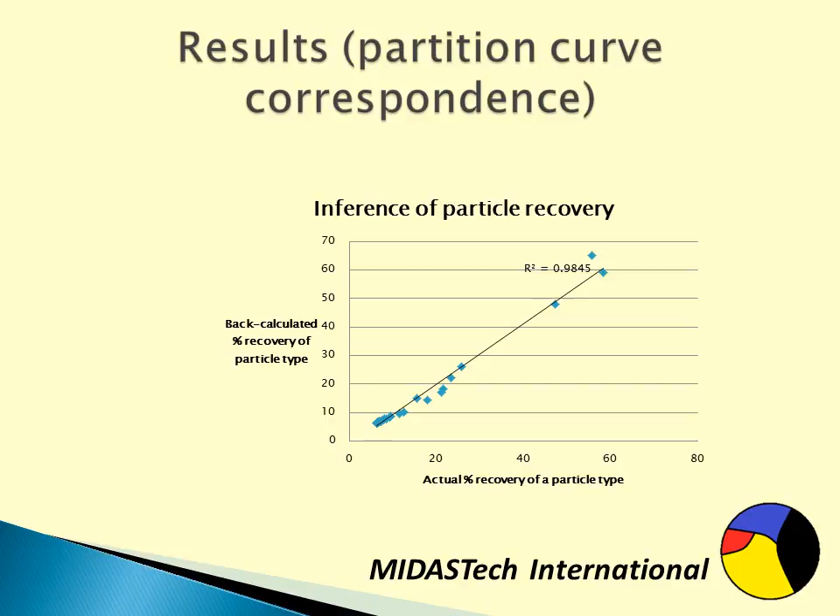And here we see the back calculated recovery of each particle type versus the actual recovery of each particle type, and the correlation is about 99%. And here we see—remember, I didn't use the mineral compositions of the cons.

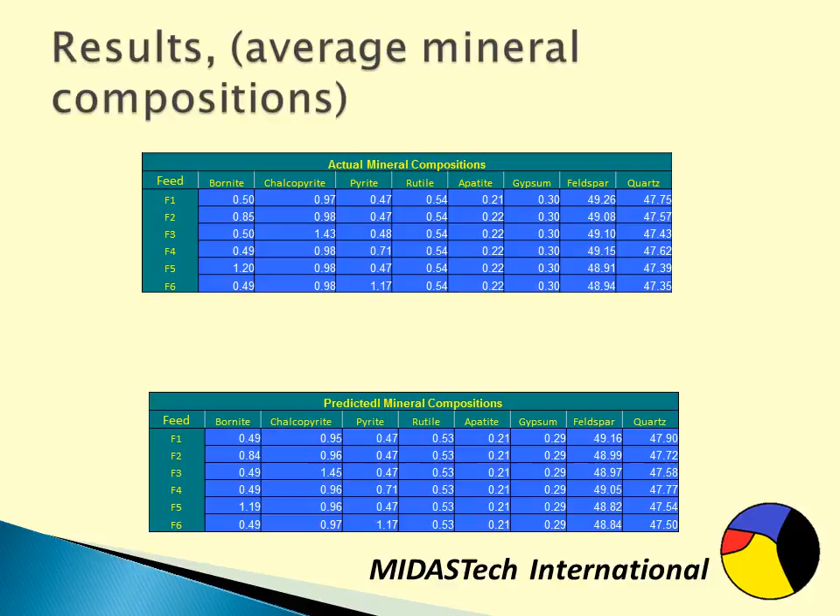Here we see what's actually the actual compositions of the various minerals versus the predicted mineral composition. And you can see, again, the correspondence is very high—again, probably about 99%.